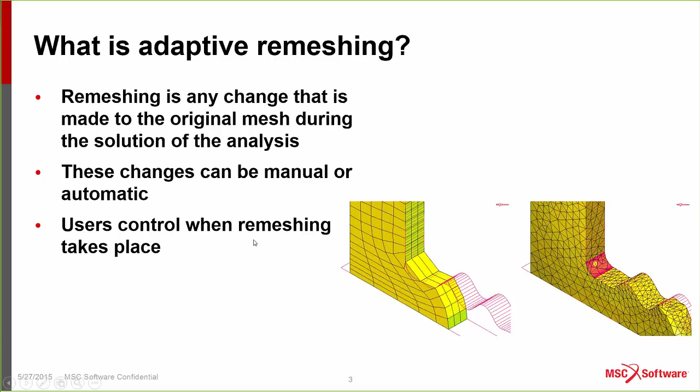So when do you use adaptive remeshing? Whenever you have a high stress and strain gradient, whenever elements are distorting extremely. If we look at this example here, initially the mesh was very good quality, but you can see that as it deforms, the original mesh cannot be used to represent a configuration like this.

More recently, we have been developing a lot of features to simulate fracture mechanics and crack propagation. You can see in this example, you have a rigid contact body fixed at the bottom, another rigid contact body torsioning this contact body, and you can see how the crack is propagating here.

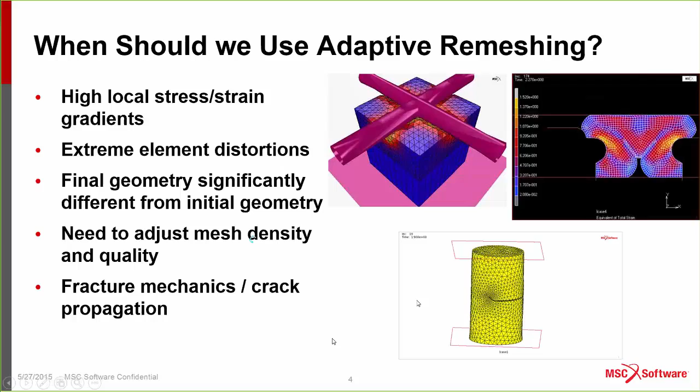If you don't have adaptive remeshing, basically the best you can do would be to simulate a crack propagating along an existing mesh, so you have to know how the crack would propagate. With global adaptive remeshing, that allows you to simulate any sort of crack propagation in your model.

So MARC has two types of adaptive remeshing: local adaptive remeshing and global adaptive remeshing. In the next few slides, we'll be talking in a little bit more detail on the difference between these two adaptive remeshing types in MARC.

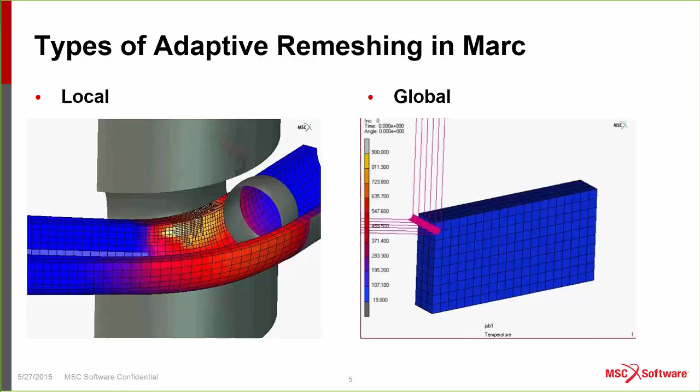So, local adaptive remeshing works on a set of elements. You can have an original element like this, you can have several elements, and when certain conditions are met, what the solver will do is take the element and just subdivide it like this. You can define several levels of refinement in MARC.

Level 1 allows the element to be subdivided only once. Level 2 allows the element that was subdivided first to be subdivided again. Level 3, you can also resubdivide the element again. Every time an element is subdivided, MARC will write the constraint equations between the newly created node and existing nodes.

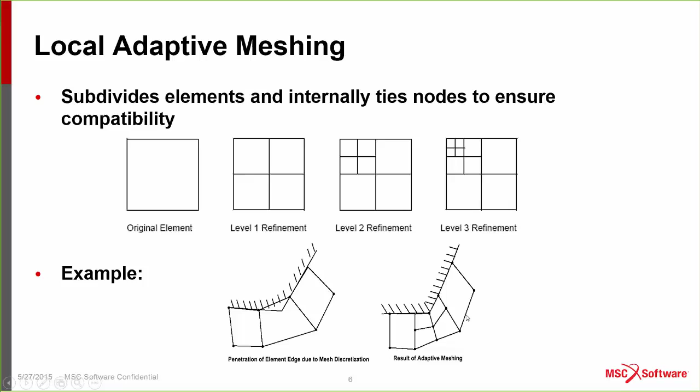So for example, if you have a situation like this, and you specify, let's say, penetration as one of the criteria for remeshing, whenever the solver detects penetration, it will take this element, subdivide it like this, get rid of the penetration, write the constraint equation, and then continue the analysis. So this is local adaptive remeshing.

Global adaptive remeshing on its own works with a contact body. So in MARC, if you have a piston rod, for example, you could define this entire mesh as a contact body, and then when the remeshing criteria is met, MARC will take this contact body, create a new mesh, and then continue the analysis.

So my presentation today will be focused on global adaptive remeshing. All I'll be talking about today will be on global adaptive remeshing.

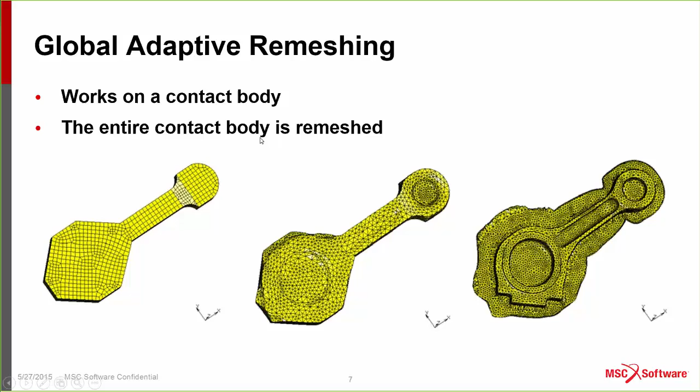When you are working with global adaptive remeshing, you need to specify criteria for when you want the adaptive remeshing to take place, and there are several criteria available in MARC. You can specify the frequency that you want the adaptive remeshing to take place, for example every 5 increments.

Or you can specify stress and strain criteria, so whenever the stresses and strains change a certain amount from one increment to the next, it will automatically create a new mesh. You can define element distortion as a criteria as well, contact penetration, and you can also define local refinement.

So instead of just defining a new mesh with a certain element edge length everywhere, you can actually specify that you want a finer mesh in one area and a coarser mesh in a different area.

These remeshing criteria can be used for both 2D and 3D types of analysis and elements. So in MARC, when you go to define a remeshing criteria, these are the methods available to you: for 2D analysis you have axisymmetric, plane stress, plane strain; here you're talking about shell elements; and here you're talking about solid elements.

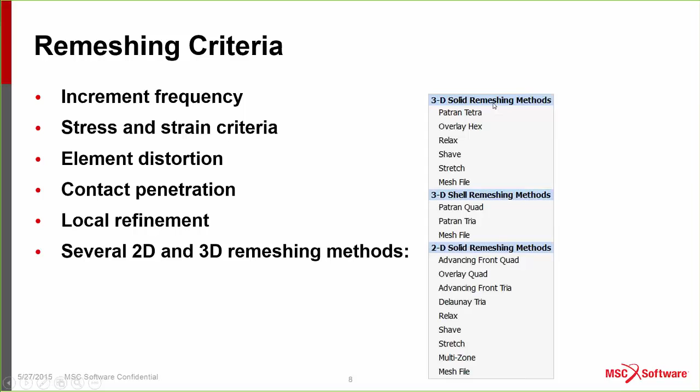Industry application: in almost every industry where you see extreme deformation, where the original mesh cannot be used anymore, you can use adaptive remeshing. So from aerospace to biomedical, electronics, oil and gas, automotive, consumer electronic products, and so on.

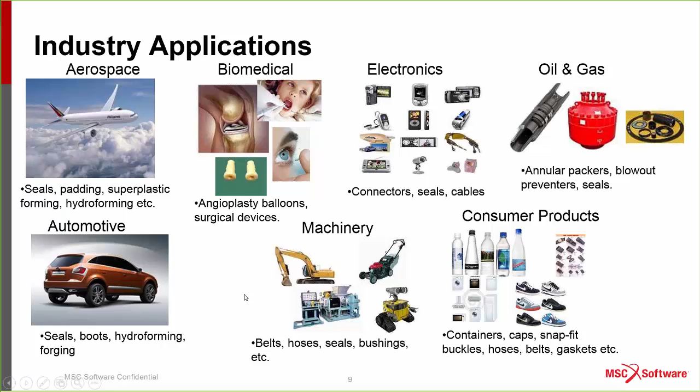So here I want to show a few application examples. This is a packer that is used in the oil industry.

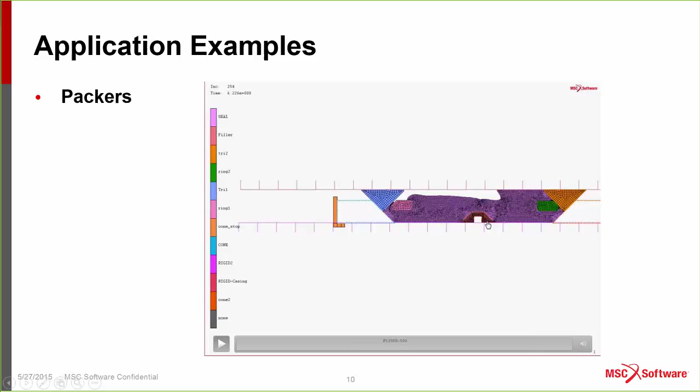You can see that this geometry here requires a new mesh. The original mesh cannot be used in this case.

Another example here would be a cutting operation. You can see the cutter cutting through the workpiece, and in the end you can even simulate the chip separating from the workpiece.

In this case, I'll be using a user subroutine to simulate this chipping falling off. Again, in this example I'm showing the temperature, so this would be a coupled thermo-structural analysis where you have the cutter cutting through the workpiece. You have friction between the cutter and the workpiece, friction generates thermal gradient, and then you can simulate and predict what the temperature and the deformed shape are in this process.

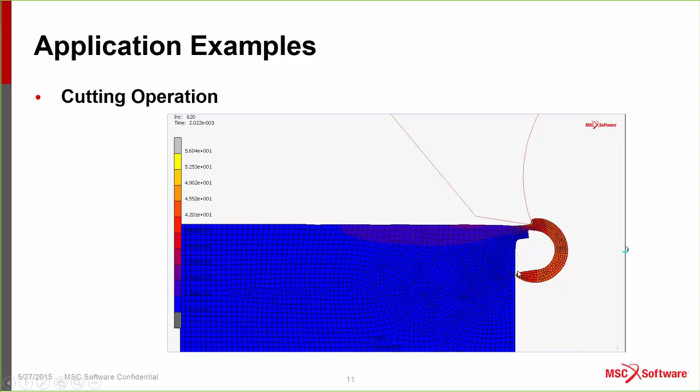Another application example is crack propagation. For a 2D type of analysis, you can see how the crack is propagating. For 2D elements, shell elements, the crack starts here and actually reaches bifurcation, and MARC is able to allow the crack to bifurcate. Also for 3D type of analysis, where you have an initial crack, for solid elements you can also see remeshing and the crack propagating through this block.

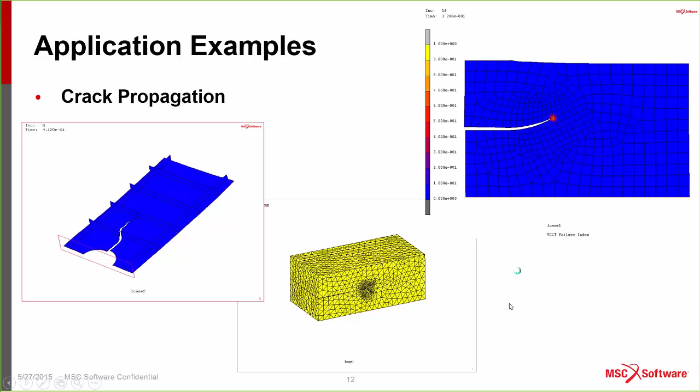So what are the adaptive remeshing steps in MARC?

Basically, you start the model just as in any usual Marc analysis. You create a mesh, you define your material properties, you apply load boundary conditions, you have all your contact definitions, just as usual, just as any Marc analysis.

And here you come and define remeshing criteria, and you just need to make sure that in your load case you select whatever remeshing criteria you want to use in the analysis.

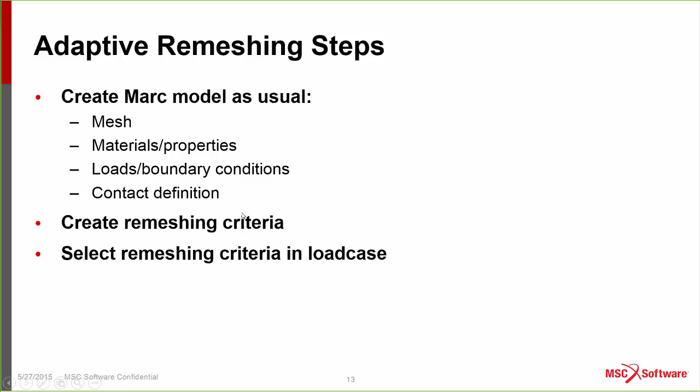So the remeshing implementation in Marc: internally, what Marc will do is check the remeshing criteria at the end of every increment. If the remeshing criteria is met, Marc starts the remeshing procedure.

It creates a new mesh based on the deformed shape. It will do a data mapping, so all the stresses and strains from the current mesh are transferred to the new mesh. Boundaries, loads and boundary conditions are also mapped to the new mesh, and then the analysis just continues.

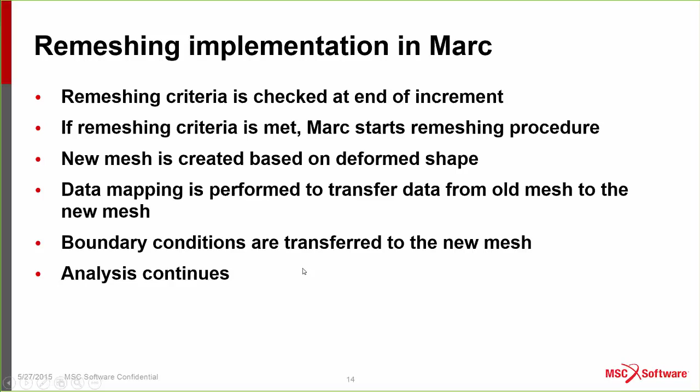So this is just internally what Marc will be doing. I want to do a quick demonstration, showing a model of a rubber seal that is subjected to pressure loading. I have an O-ring, and I'm just modeling a section of this O-ring.

I could just use a plane strain analysis for this example, but I wanted to show a real 3D model being analyzed here. So this picture shows the different contact bodies used in the analysis.

I have one deformable contact body, which is the seal, and then these green contact bodies are the symmetry contact bodies. I have a fixed contact body here against which the seal is going to be compressed, and then I have this contact body here, which I call 'down'.

So I compress the seal, and then the pressure is applied. Please notice that because I don't know how the final shape of the seal is going to be, I don't know which faces I should be applying the pressure on. So what I do in this model is apply the pressure on a set of elements that I think will have pressure.

Marc has a feature where if you have a pressure applied on an element face, and all the nodes on this face are in contact, it deactivates the pressure on that element face. The moment one of the nodes is no longer in contact, the pressure on that face is activated and applied to that element. This is a very powerful, very convenient tool for this type of analysis.

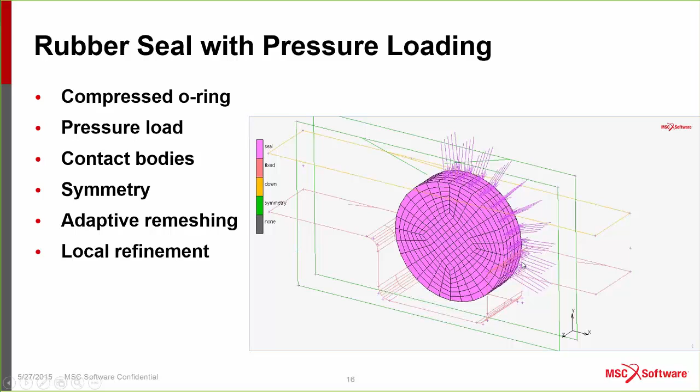So this is going to be the final deformed shape, and you can see that initially when I compress the O-ring, it is symmetric. Then, when I start applying pressure on this side, you can see I start exposing some of the elements that were fully in contact initially, and as they become out of contact, the pressure is applied to them.

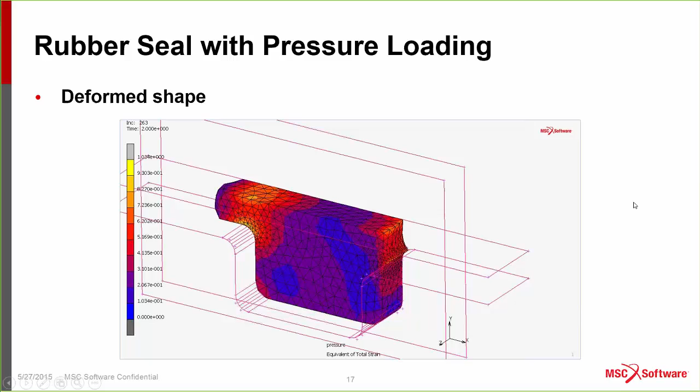Ultimately, what I want to determine here is whether the pressure I apply still allows the seal to seal what it is supposed to seal. Okay, so let me go...

to Mentat. So this is my Mentat model. What you can see here is the menu tree for Mentat. You can see the material model that I have defined—it's just a Mooney model with a constant C10, C01 defined.

I have my contact bodies here: my deformable contact body and my fixed contact body, which is velocity controlled with zero velocity, so this rigid contact body is just fixed in space. I have this 'down' contact body, which is velocity controlled, and I apply a velocity of 0.3 negative in the y direction. This table velocity controls the movement of this contact body.

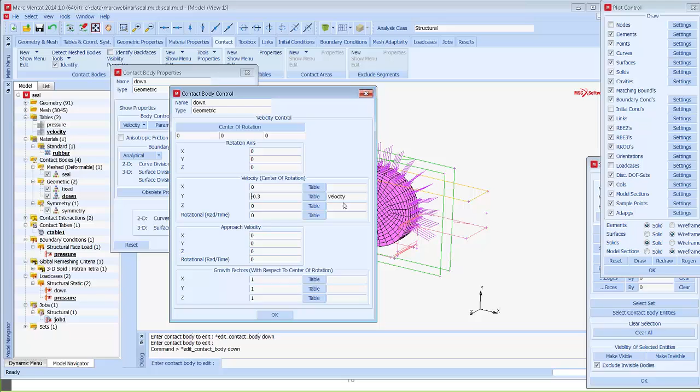This table velocity has basically two load cases. In the first load case, I'm compressing the O-ring, and in the second, I'm applying the pressure. Load case 1 is from time 0 to 1, where the velocity is minus 0.3. From time 1 to time 2, when I'm applying the pressure, I keep the contact body fixed and the velocity is 0.

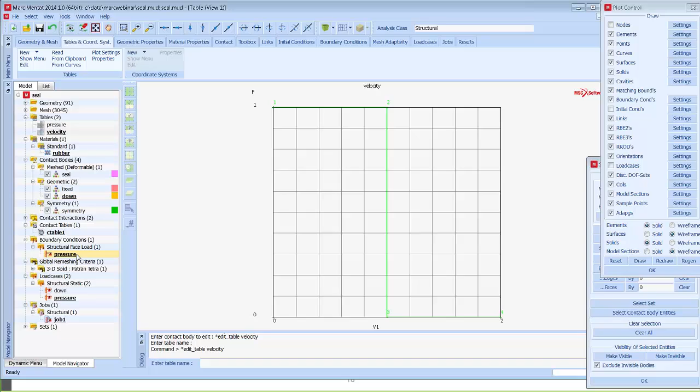And then I have my pressure boundary condition. I'm applying a pressure of 1200 psi. The table pressure is controlling the pressure application. And here is that feature that I talked about, load active in contact.

By default, all the pressure load is active regardless of whether the nodes are in contact or not. But if I deactivate that, Marc will check all the nodes in the face where the pressure load is being applied. If all nodes are in contact, then the pressure is deactivated.

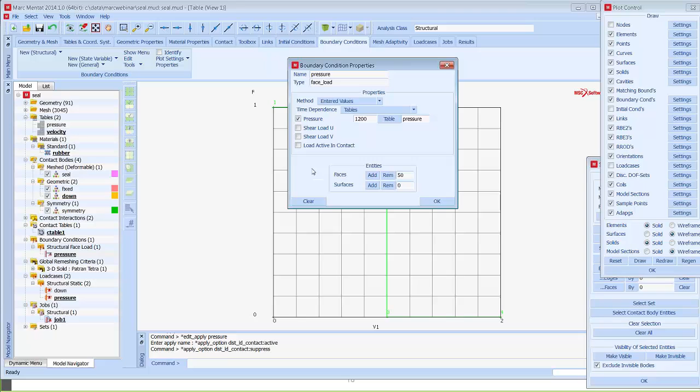Okay, so I just want to show you this pressure table. From time 0 to 1, I have a pressure of 0, and then from time 1 to 2, I'm linearly ramping up the pressure.

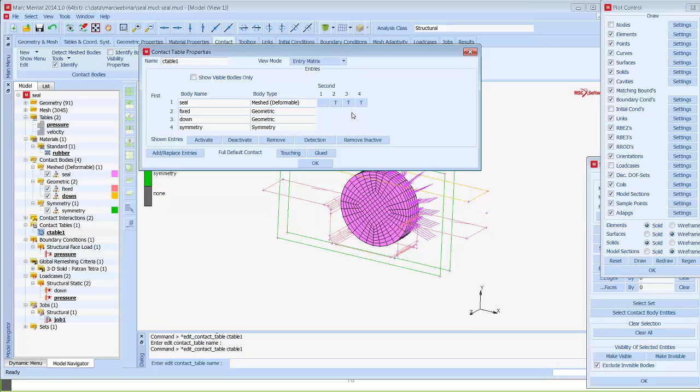So I have my pressure application, all the way up to this point, and I have my contact table as well. In my contact table, I just define friction, and I define that my seal is in contact with all my rigid contact bodies. So all the way up to this point, this is just a regular Marc analysis.

The adaptive remeshing that you do: you go to the adaptive mesh adaptivity tab, and go to new, and then here are the different remeshing methods you can specify. Since I'm dealing with a 3D contact here, a 3D type of element, I'm going to choose Patran Tetra as my remeshing method.

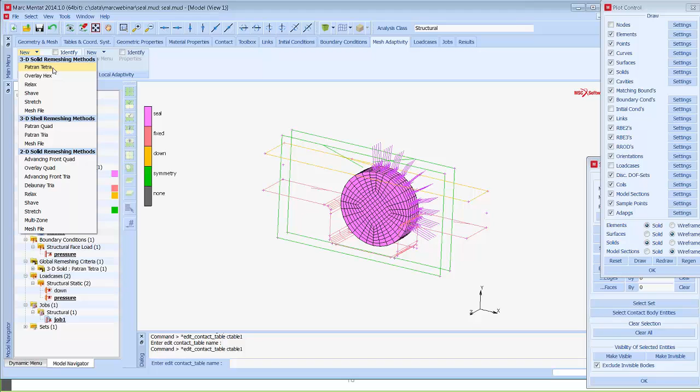In my remeshing method, you see the name adapg2. Here would be the remeshing criteria you can specify. I can say I want to be remeshed every certain number of increments, or I can request immediate remeshing, and I'm going to just use immediate remeshing in this case.

You can go to advanced, and in advanced you can choose: I want remeshing to take place whenever my strain changes by a certain amount, or if I have penetration, or I can use a volume ratio as well. In this case, I'm just going to use strain change and penetration.

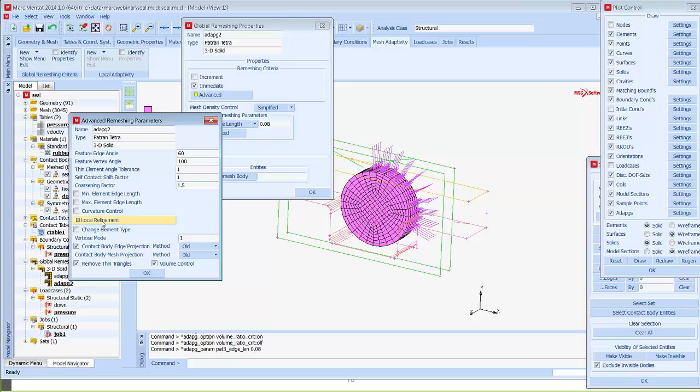Here I can specify the element edge length for my model. In this case, I'm going to use 0.08. And in advanced, I can have my local refinement, so I can specify a local refinement around this fillet, and around this fillet as well.

So I'm going to specify different boxes. The first box, one here, and I can specify the levels I want. I'm going to go with level 2, two levels, which means in this refinement box that I'm defining, the refined element size will be 0.08 divided by 2, divided by 2.

For corner 1, I'm going to specify this point. For corner 2, I specify this point. And then I can say that these boxes will be moving with my fixed contact body, which means it is not going to move. This allows you, if you have a contact body moving, to actually define this refinement box to move with that contact body.

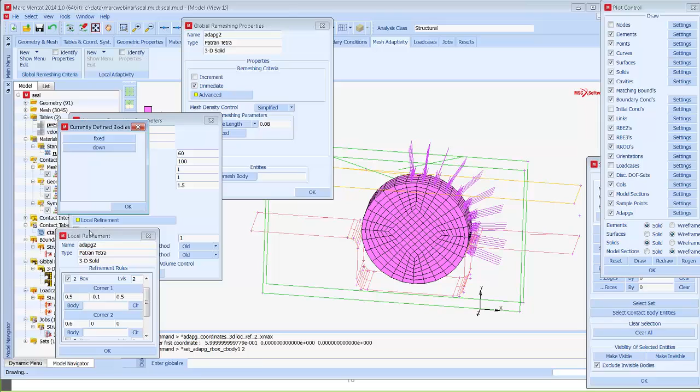And I'm going to do the same thing for box 2, refinement level 2, and then define it in this area here. For the first corner, I'm going to pick this point. Second corner, I'm going to pick this point here, and body fixed and body fixed as well.

And lastly, I also need to define which contact body I want to use for this remeshing criteria, so I'm going to use seal. That's all I need to do for my remeshing criteria.

Then I need to make sure that in my load cases I have my loads selected. And then in the global remesh, I need to go and specify which adaptive remeshing criteria I want to use. I already had adapg1, so I'm just going to use adapg1. Same thing for load case 2, pressure. Make sure that you specify which remeshing criteria you want to use in your analysis.

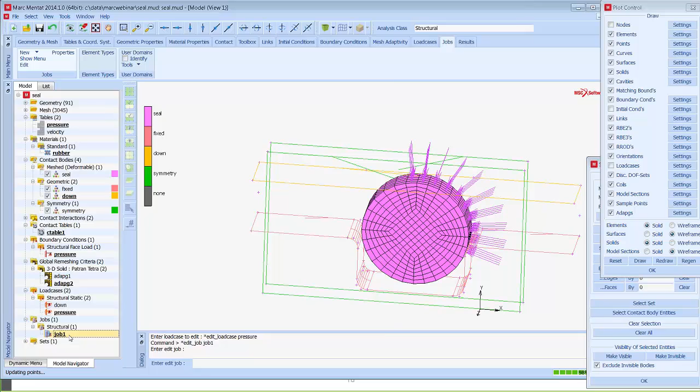And then you go to your job. Select the load cases that you want to run.

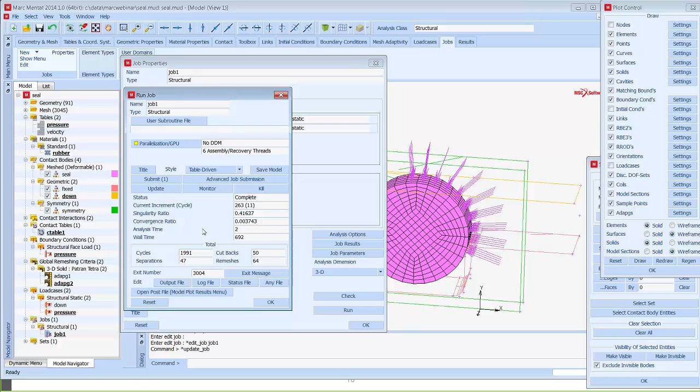And then you are just ready to go and run the analysis. I'm not going to run this analysis now, but it took about 11 minutes to run. You can see exit number 3004, and you can just open the results.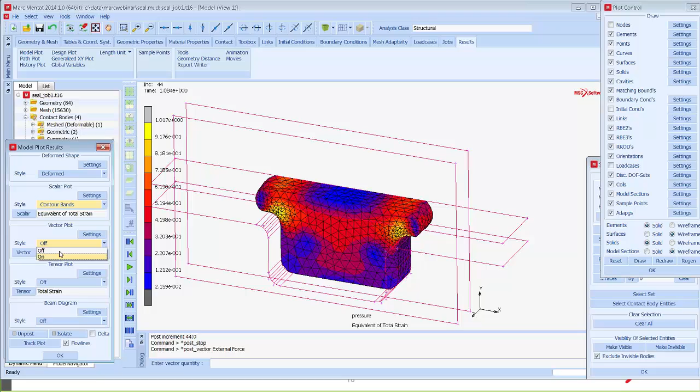I just wanted to show you how Marc is applying the pressure here, making sure I don't have pressure being applied on the top or on the side. So I can go to style, vector, choose the external force, and turn that on. If I put it on a side view, I can see the nodal forces being applied due to the pressure on this side.

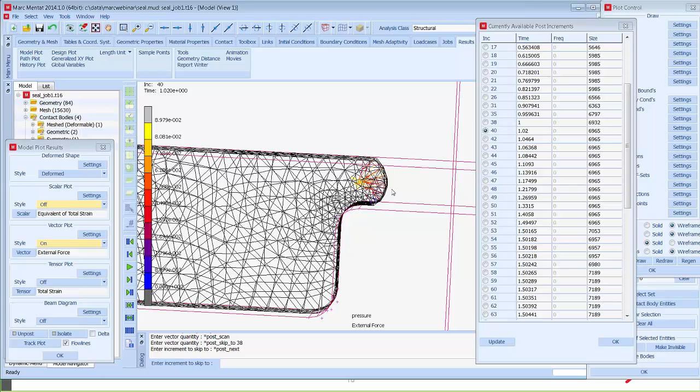If I go back to time 1, which is at the end of the compression stage, there is no pressure applied. The moment I go to the next increment, you see that now I'm ramping up the pressure application. That's just to make sure this is what Marc is doing. If I go to the contour plot and the last increment, you can see how the deformed shape looks.

Another thing you can do in Marc, in post-processing, is particle tracking, for example. In the beginning, the O-ring was just a circular shape, and sometimes you want to know what happens to the material, how it is flowing as the O-ring seal is being compressed.

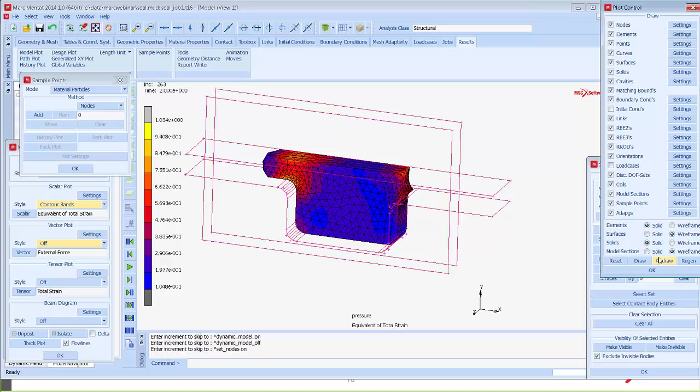So we can go to the sample points and turn the nodes on. Let's say I want to see on this side here how this node got to this point. I can do a material particle tracking and specify this node, and I'll arbitrarily pick a few nodes here and even a node in here, then right mouse click to accept these 4 nodes.

Then I can go to track plotting and say all points. This will take a few seconds because of the T16 file — the results file is about 400 megabytes, so Marc Mentat has to go through the entire T16 to gather all the information to be able to do this particle tracking. Right now it's going through... okay, it's done.

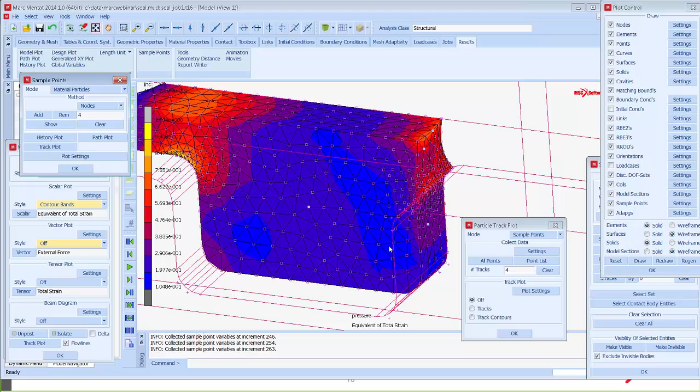And what I can do is just do tracks. Let me turn the node off so we can see better. So what you can see here is that those nodes I specified — that's how they were initially, and that's how they moved. Here is when they were fully compressed, and here is when you start applying the pressure.

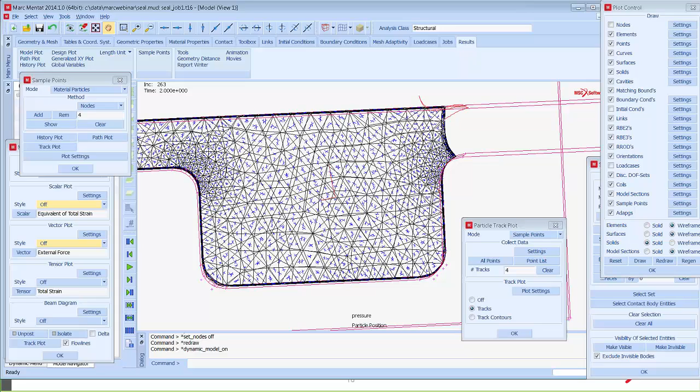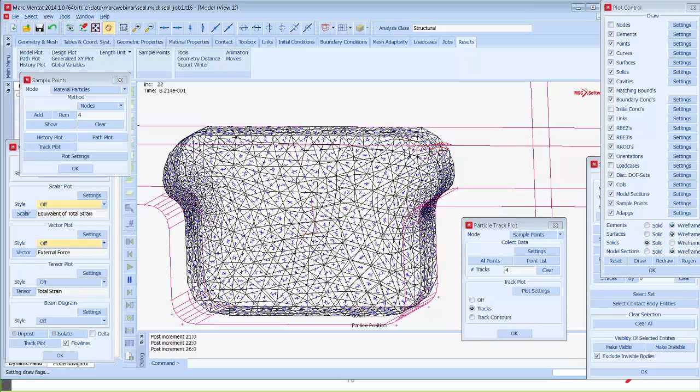So if I go to the first increment, you can see originally where the nodes were, and then I can just hit play and see how it is deforming, and how the material is going. The material is here, and now with the pressure being applied, it goes to its final location.

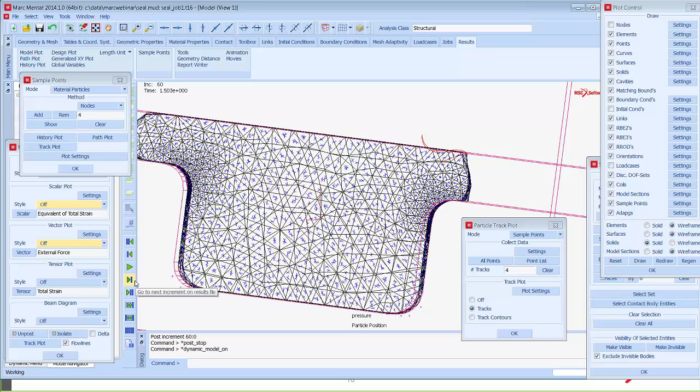So these are some of the things we can do with adaptive remeshing. Let me go back and just do a summary. Hopefully I was able to show how easy it is to use adaptive remeshing in Marc.

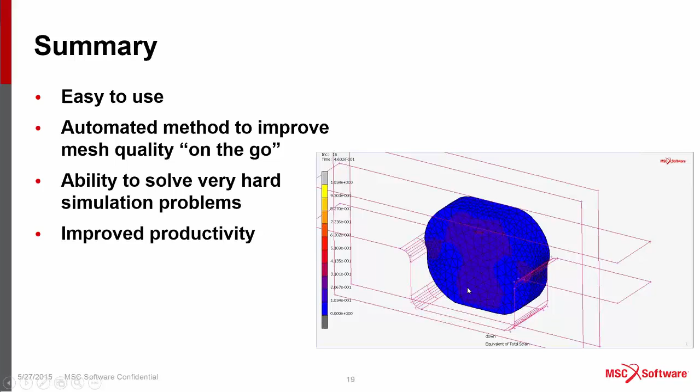You can also see that by using adaptive remeshing, the solver automatically improves the mesh quality on the go, so in this case no user intervention is needed. Adaptive remeshing gives you the ability to solve very, very hard simulation problems. Something like this would take several interventions from the user, several restarts probably, if you didn't have access to automatic adaptive remeshing, and hopefully this will give you improved productivity in your analysis.